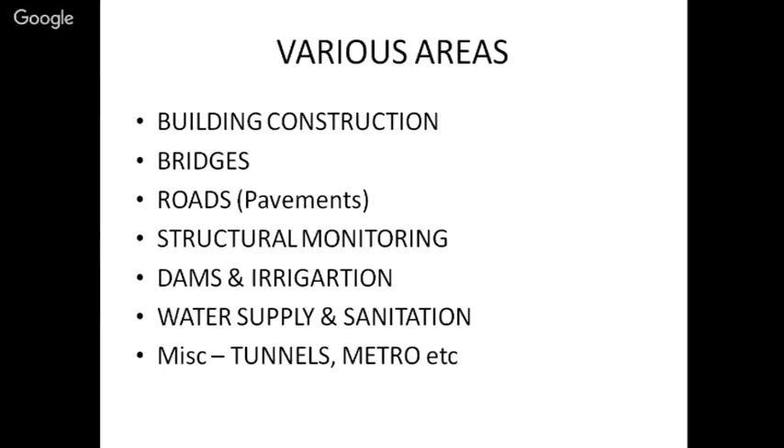Now, whether you are talking about building or bridges or pavements or any of the discipline areas, how are we actually looking at the emerging technologies? One could be the betterment of a quality product. The second could be a faster pace of construction. And third, environmental sustainability is one big aspect.

So the basic principles or techniques which involve all these: the first basic technique is recycling. We will see how recycling is helpful. Second is prefabrication. Then third is green materials. And fourth is energy efficient materials. The energy efficient materials and green materials are slightly different. And then come certain other materials or additives which need to be used in conjunction with the traditional material, or which may be a new material, or which may be simply an additive to prepare materials like concrete itself.

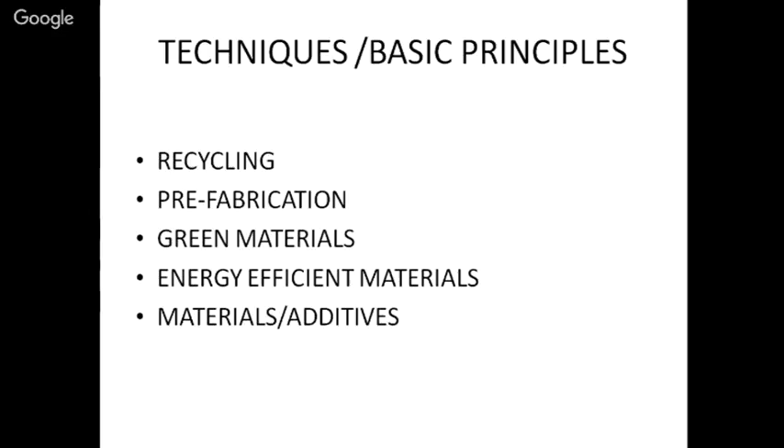Concrete is one of the largest building materials used all over the world, and it is one among the ancient materials as well. And it is important. What has taken place is that from the traditional concrete we have been understanding, we have been trying to achieve a kind of material that serves the same purpose but maybe is lightweight, because nowadays there are a lot of earthquakes coming up. So we all understand, the lighter the material, the lesser would be the damage if anything falls on you or touches that.

Unfortunately, the techniques which are suitable in India are more reliant on heavy building material because of safety reasons. If you see in the US or other countries, they prefer to build houses of wood or other lightweight materials. But unfortunately, they are not secure in our country, so they can be easily broken into. Similarly, if you take the example of Japan, they build lightweight construction because every second day they are having earthquakes. So we can learn a lot from them.

Concrete requires a lot of consumption of material, natural resources like aggregate. Then cement production is one of the prime things, which is again obtained from natural material using lime and other resources. And traditionally we have seen that from the earlier mixers we are coming to ready mix concrete, where the concrete is now prepared in the plant, then brought to the site in a tanker type of thing.

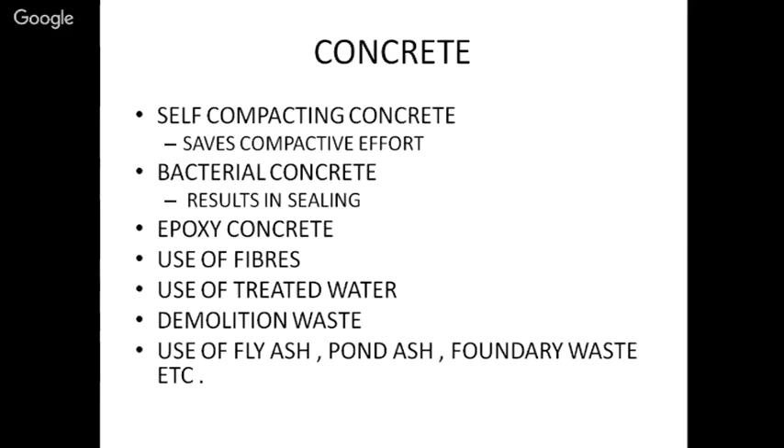A lot of other waste materials like fly ash and pond ash, which come from the thermal plants, and other similar types of industry usage, like foundry sand. Foundry sand is where the sand is used for mold purposes. Then it gets heated up and loses certain properties, so it's finally discarded by the industry.

Similarly, we have the marble industry. When the cutting of the marbles is done, the powder goes waste, so it is dumped in the form of a slurry. So the biggest problem is not simply that we want to save money. The key issue is that we want to conserve the environment, because all these waste materials are either put into the water body as a slurry, for example the marble dust slurry, or put into landfills. Land is also very important.

For example, if you do it in Chandigarh, on the outskirts, tomorrow after 5 years you need to expand the city. So what do you do? Are you going to remove it again, or what are you going to do about it?

Another area we are touching upon is prefabrication. Contrary to what we have traditionally been doing here, we were building at the site whatever plans are there. Prefabrication means that you build a component not at the site but in a factory, just like you make a component of a car, and then bring it to the site and join them together.

So how is it going to help? It has already been used in buildings and bridges, and it helps you do construction in a faster manner, with so much emphasis on the Swachh Bharat scheme, where you want to build toilets, and secondly on housing for the poor. If you do it traditionally, it is going to take another 30 years to meet the present requirement. But if you do it in the prefabrication manner, that period will be reduced.

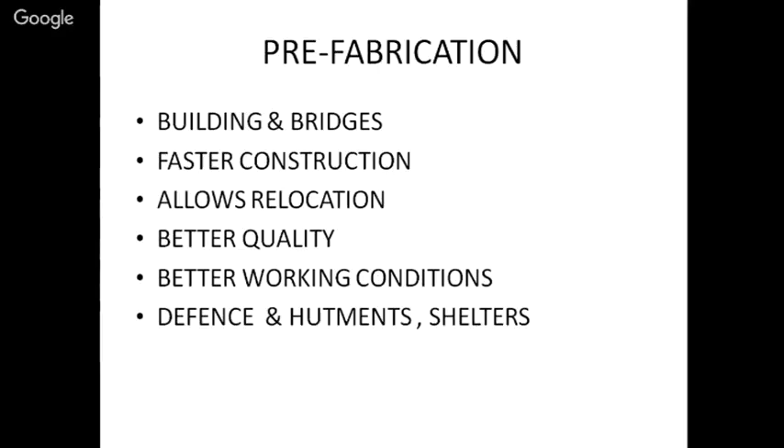For example, a disaster hits a country, an earthquake or a flood, and 10,000 people need to be relocated. You can't have housing built for 10,000 people in 2 days or 3 months; by that time it will be over. So prefabrication helps there. You can put the blocks, and that's one simple thing.

It's a building under completion. The slide please. Okay, so it's a building under completion. You can see that only the roof is yet to be placed.

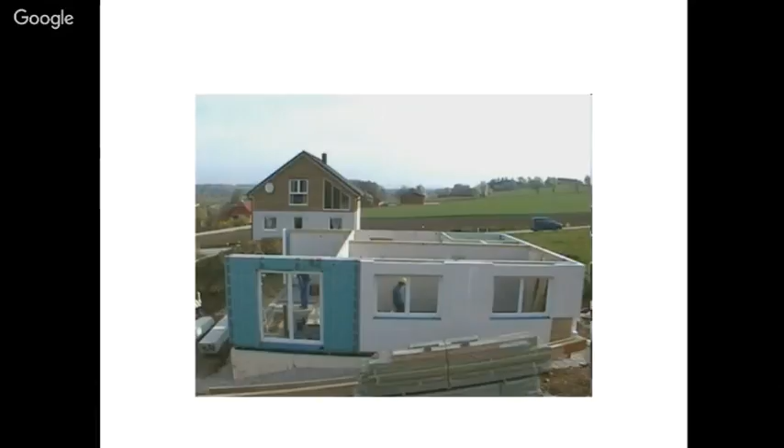The only issue with prefabrication is that you will not have much architectural choice in designs. It will be a duplicate, a replica, like here. So this is a quick one. It doesn't take more than a week to be prefabricated.

That's a crane, which you need to do the fabrication of a bigger one. Up to 3-story buildings can be done very successfully and easily. Beyond 3 stories, of course, you need special measures or techniques, but up to 3 stories it is very convenient. You may require 1 crane or sometimes 2 cranes to pull up the components and place them where they are meant to be.

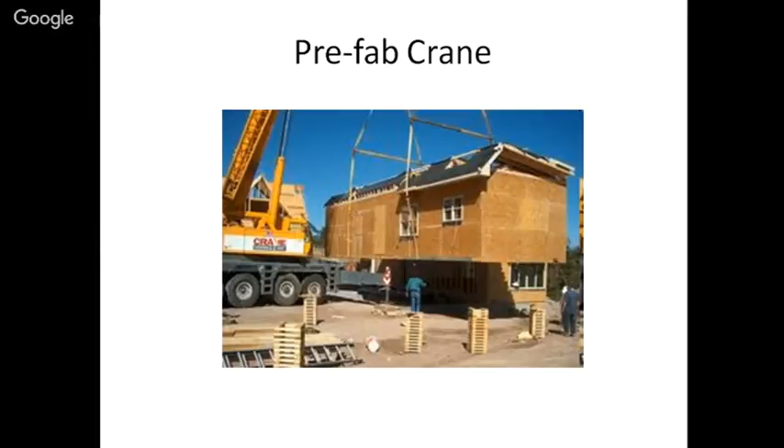Okay, now green materials, green buildings, green technologies are buzzwords nowadays. So what exactly do green materials mean? They are not green in color, everyone knows that. Green materials basically mean that we are in totality aiming at the reduction of energy consumption, from the point of production to the application.

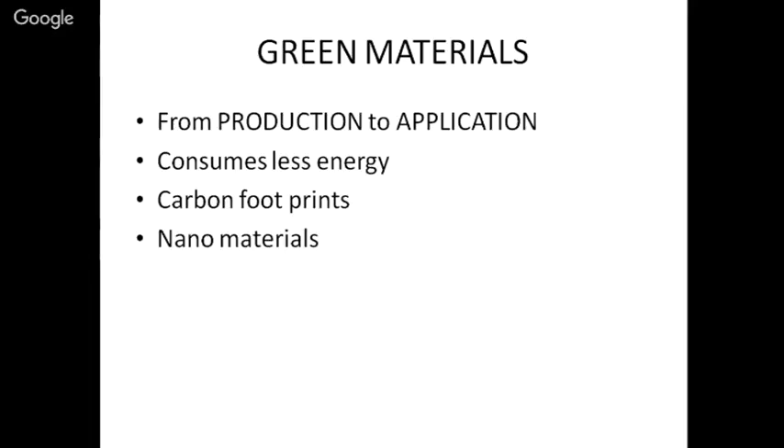And natural sources mean either you are going to do excavation, remove them from the riverbeds, or dismantle some of the hills. In Rajasthan, of course, the requirement of marble has already devastated certain ecological balances. And if you remember, in the states of Haryana and Punjab, mining is banned for those same reasons.

Mining may be bad, but what about construction? You are looking for more construction, more housing, more roads, infrastructure. They are not stopped. So what to do? You have to look for alternatives.

Energy-efficient materials or techniques are slightly different from the greener ones. When I say techniques, I'm actually using the conventional material but making some kind of amendment or modification. For example, perforated concrete. Perforated concrete means concrete having voids. They are filled deliberately with air, and we all know air is an insulator.

So if you have hollow block construction, your air conditioning requirements will reduce. If it is too hot outside, the hollow block or perforated materials will not allow that heat to be transmitted inside. Likewise, the same will happen in cold conditions. So ambient temperature conditions are produced, and your energy requirement for heating or cooling will drastically reduce using perforated material. Likewise, then fly ash bricks.

So adding fly ash in the production of bricks. Fly ash has been the waste material, and by this time, so many techniques have been developed that fly ash is picked up by the cement industry. They use it in the production of cement, and in fact now it is being sold out. And that has been the growth.

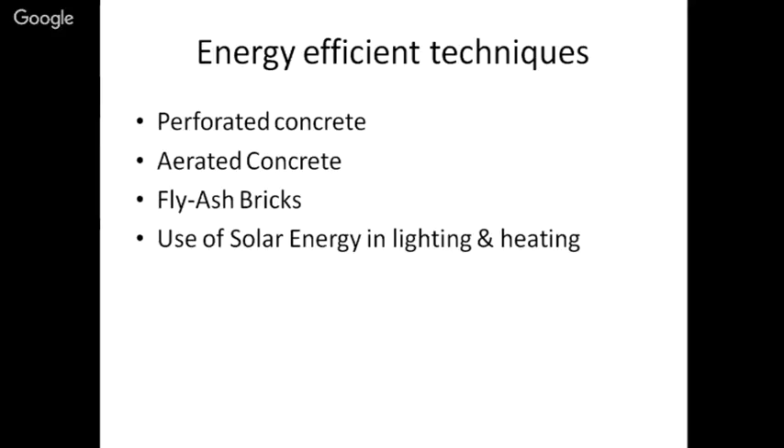Then of course solar energy in lighting and heating is one. In geotechnical areas, it is extremely important to maintain the ecological balance. We have two major requirements. One is that you need to use the wastelands. For example, in Bombay, when the cities expand, the outskirts of the city have earlier been used for dumping purposes, so organic domestic waste. They become organic. Now you want to expand the city, so you want to reclaim those lands.

So how do you do that? I can't build a foundation on a weak soil because my building will sink. So what do I do? But if the land, because of its proximity to the city, becomes prime land, I can use that. So there we have to come up with solutions like strengthening of the foundation soils.

So what we have is, we have got some chemicals now, like RBI, produced by the company Alchemist for medical reasons, but the same company's sister concern is producing the chemical. It will enhance the soil strength by 10 times to 20 times. But you need to properly evaluate and find out the dosage, what kind of quantity. So I can use that because it's not expensive. You spend some money, but then you reclaim the land.

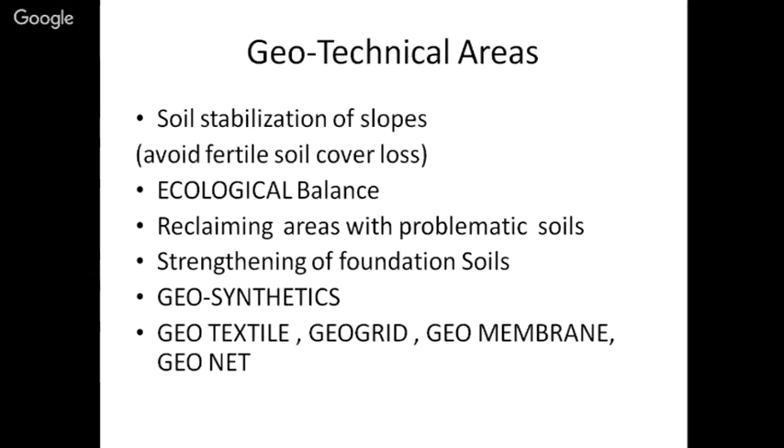The other solutions are geosynthetics, like geotextile, geogrid, geomembrane, geonet. They are either used for strengthening the soil, or one of the prime areas is stabilizing the hill slopes. Because of rainfall or instability, the slopes are not stable, so a lot of hills get destroyed. A lot of the fertile top cover gets lost, so you have a drop in agricultural produce. So there the stabilization or protection can be done using geotextiles. They can simply be fixed on that, or there are many other techniques. Similarly, geotextile for improving performance of roads can be used in different application areas.

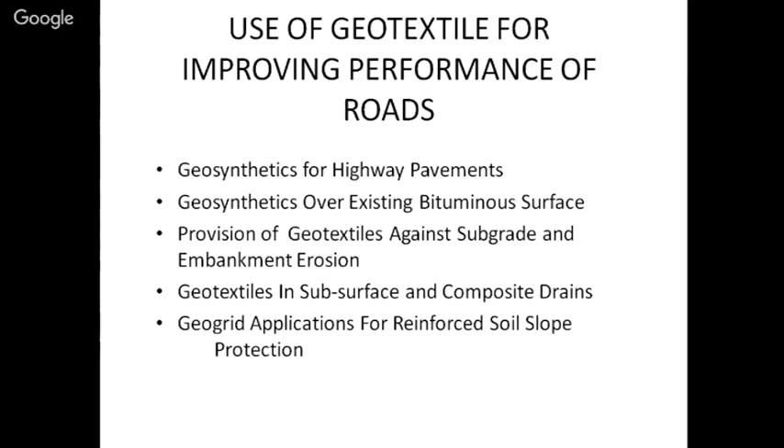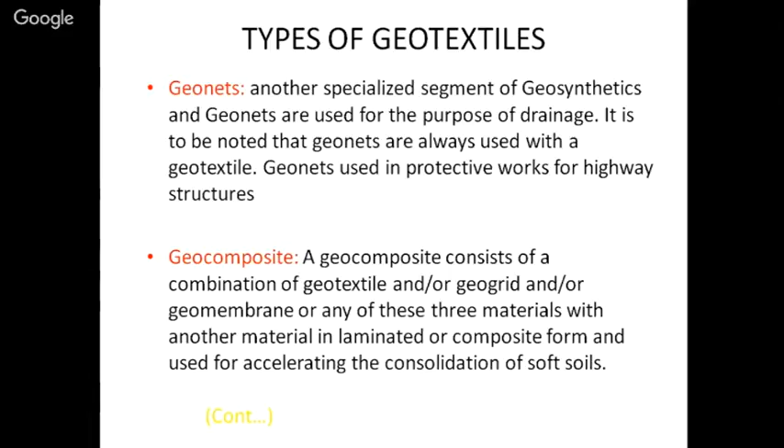So geotextiles, geogrids, geonets, geocomposites, they are different variations. A geogrid is just like, if you see a garden, the mesh type of fencing done there. It's that kind. And geosynthetic is similar to the green colored sponge we use for cleaning utensils. It's that similar kind of material. They are of course made from special ingredients because they are going to last for 20 to 50 years. So that makes them a bit expensive.

Geomembranes, for example, are just like polythene sheets. If you want to save water in irrigation, in a canal a lot of water gets drained out because of seepage, maybe 25 to 30%. So if you just do the lining with a geomembrane, the only losses will be evaporation losses, no seepage losses. Because water is also becoming scarce, spending money on these techniques becomes very, very handy and useful.

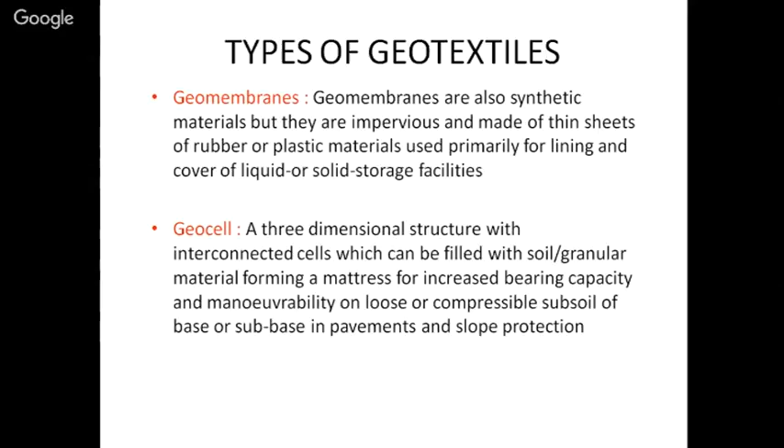I'm going to give you a little more detail about one area, pavement. Road infrastructure has seen a lot of growth, and the present government has doubled the number of kilometers constructed per day within a short time of assuming power. It was 8 kilometers, now 16 kilometers per day. That's the target in national highways and state highways. We need not only the material to build the infrastructure, we also need to sustain and maintain it. So we'll be requiring top-ups because of additional traffic. So what you have is a surface course, which is 30 to 50 mm at the top.

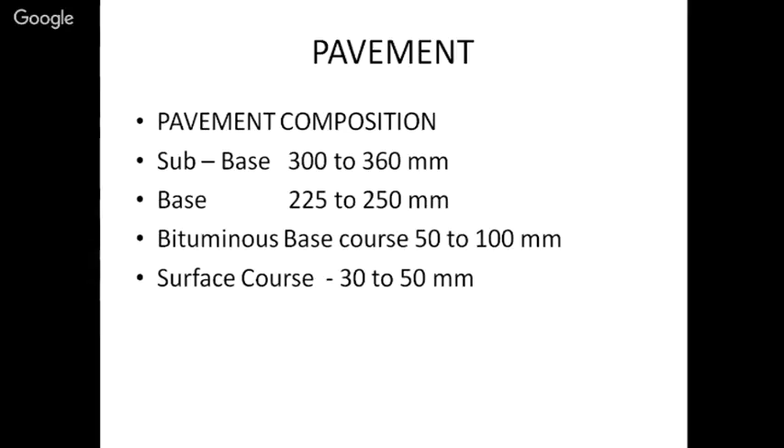And every 4 or 5 years, it will develop cracks, because it has a useful life. So what people normally do is put another layer on that. And then at some stage, it becomes very, very thick. And when it is passing through inhabited places, because of drainage problems, you need to remove that. Or with development, you need to relocate the highways.

So what do you do with the old materials? You have been discarding them so far. But now, because of the overlay, to give you an example, it is so expensive, and every 3 to 5 years you have to put some layer which demands bitumen of 5 to 5.75%, and bitumen costs are also rising. So I need to conserve the material, because aggregate needs to be saved, natural sources, as we already mentioned, and it is threatening the river beds and mining both.

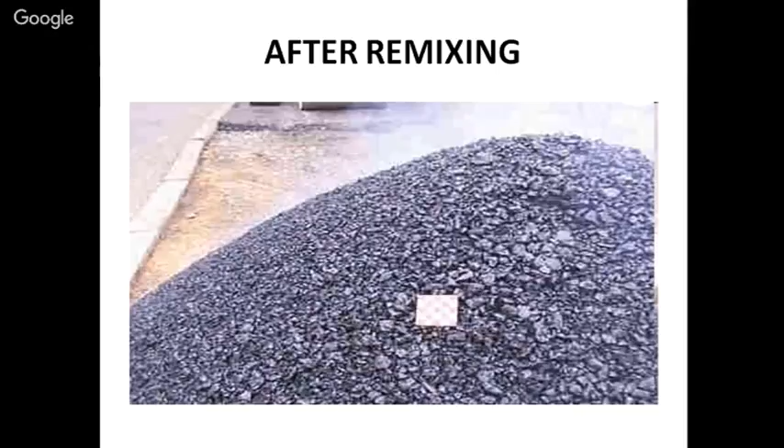Bitumen cost nowadays is something like 60 to 70% of the total road cost. Earlier it used to be different. It costs you something like 36 rupees a kg. So saving 1% of the bitumen is very significant. And second, the biggest thing is that if I am not reusing it, where am I dumping it? I am spoiling the land, because it is not going to be used anywhere else. And if the pavement is too old, then I'm going to use it in the bottom layers.

So we did a lot of studies, and studies have been done all over the country and the world. And it is found that up to 30 to 35% of the old material can be used in the bituminous mixes, and up to 40% of the material can be used in the granular layers, meaning the bottom layers, when the pavement is very, very old. So that's one example.

And just to mention 3 studies which we did. This was a case where we had demolition waste in one area where a college building was coming up. So the demolition waste was crushed under the roller, and it was used as one bottom layer. So we saved 150 mm layer for the whole of the road and the parking. It was done 8 years ago, and it is working perfectly.

Then another case was reconstruction. When we were removing, we encountered big boulders. The specification said you can't use something more than 75. But we did some study and we reused each and every material which was removed from that site. So the bottom layer was made from that.

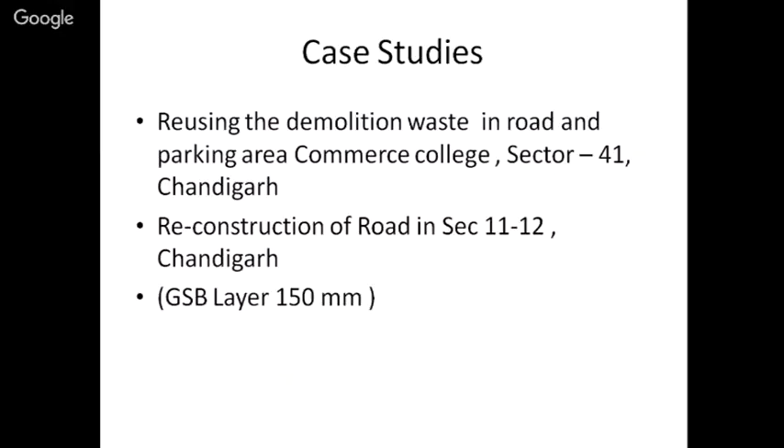So you need to use your ingenuity and come up with solutions. The codes or guidelines are meant to be guidelines, but they are not dictators. So if you are confident that the performance can be achieved, why not do that? That is engineering, economization, giving the solution. Similar cases have been done, and we did post studies also, and they have been found to be performing quite well.